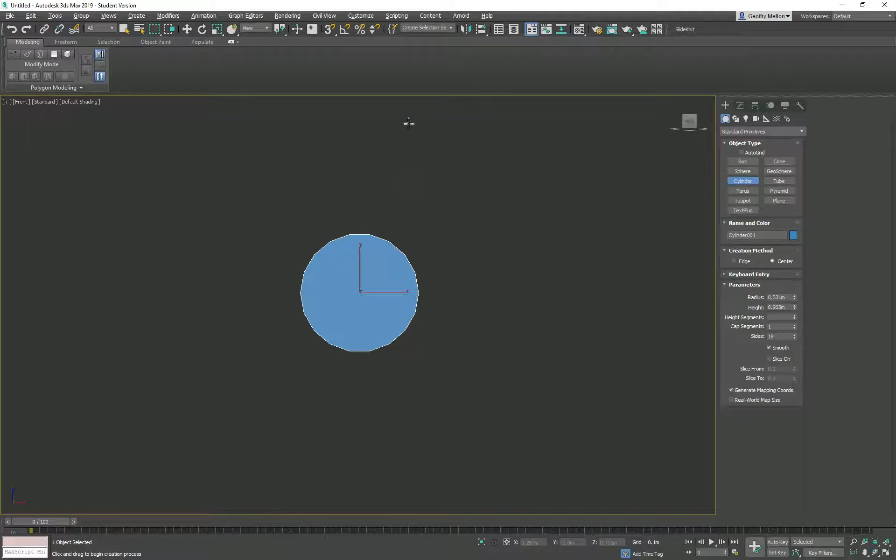Got a front view. Oops, did that wrong. So again, go to the top view, cylinder up. Go to the front. I'll thin it out, let's say 0.25 for the width. It's pretty tall, so let's just say 1 for now. We'll do 0.1. These are meters, so they're going to be big.

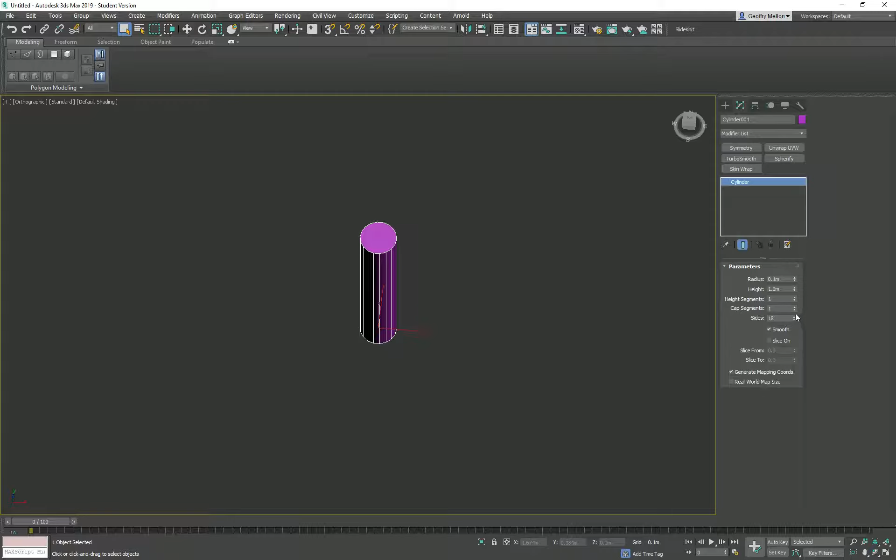At this point, what I've been showing you is you don't need any of this other stuff, just the amount of cuts you want on it. I think the last one we worked with was 12 for a test. So if we look at this, we collapse it down to an editable poly.

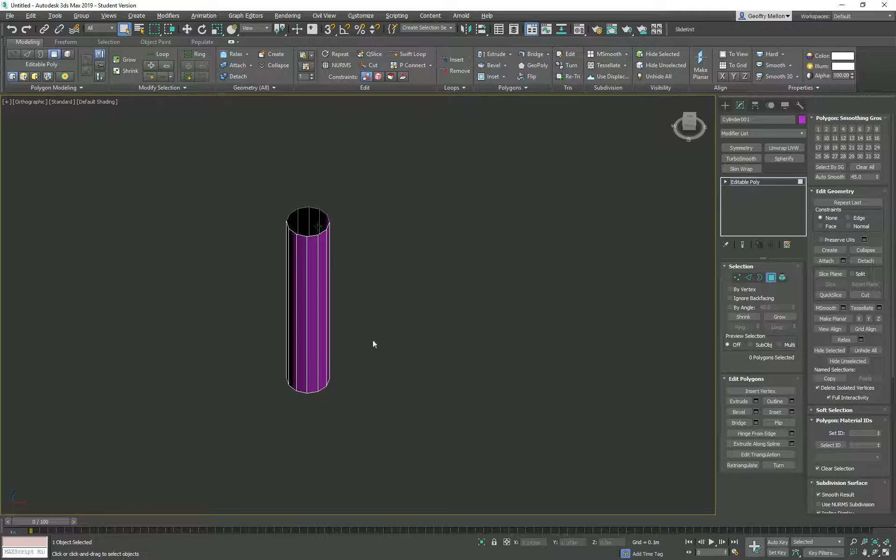If I wanted to make this like a handle with straps on it, how would I do that? There's always two or three ways to do it. If you do it the way I do it, one way... but let me show you a different way real quick.

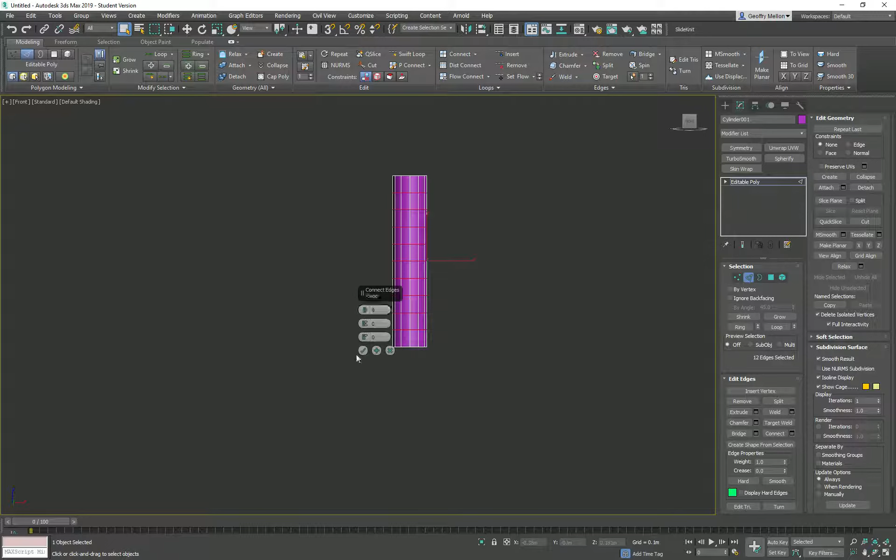I'm going to grab all these edges and divide them. I don't want to use Swift Loop, this way I can get them all even. I'll divide them... let's say that many. And then I'm going to hit 4 to go to poly mode.

Grab all of these. Now I'm going to have to do it a little bit different. I'm going to grab every other one of these like this. Then I'm going to extrude.

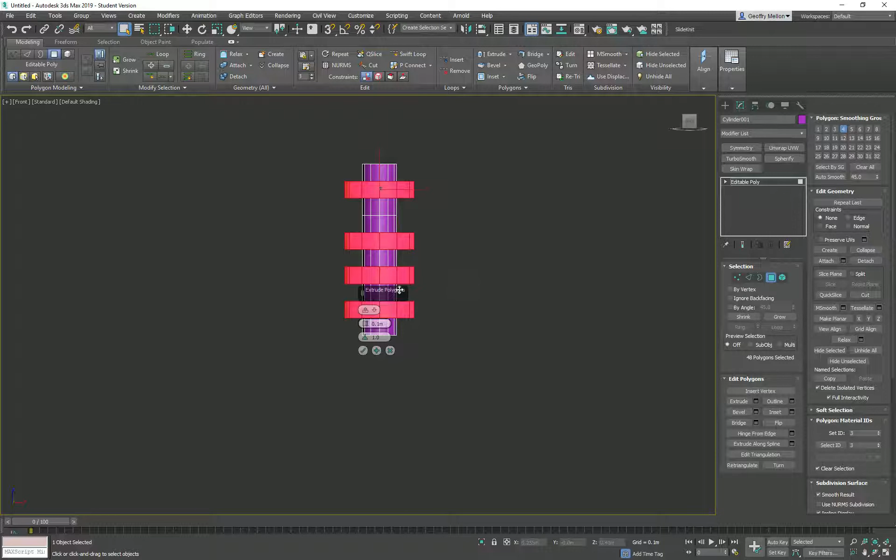Then along a local normal, I'm going to pull this back in—actually let's do bevel instead. I always say extrude but I mean bevel. Again, same problem, very cool looking if you're making a gear, I guess. Pull this in way much. Oh, that's pretty good there actually.

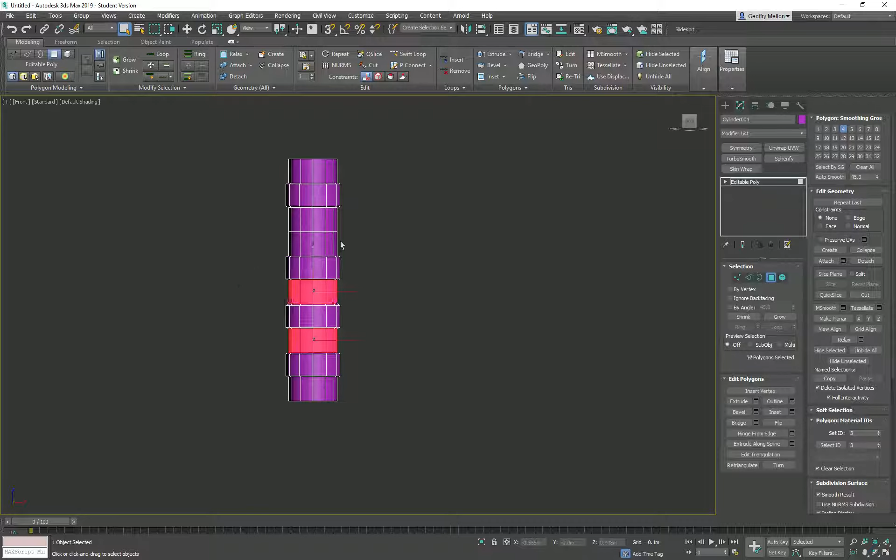Let's pull this in just a little bit here. We'll pull this out a little bit. Okay, I can take these. It looks like I missed one.

You don't want to do the two next to each other, because if I do, I'll show you—it's automatically going to keep that, but if I grab the two next to each other, it's going to grab them both as one. So I have to do this a couple times, I'll just take that and do this last one. And then if I turn off... you know, I've got a handle.

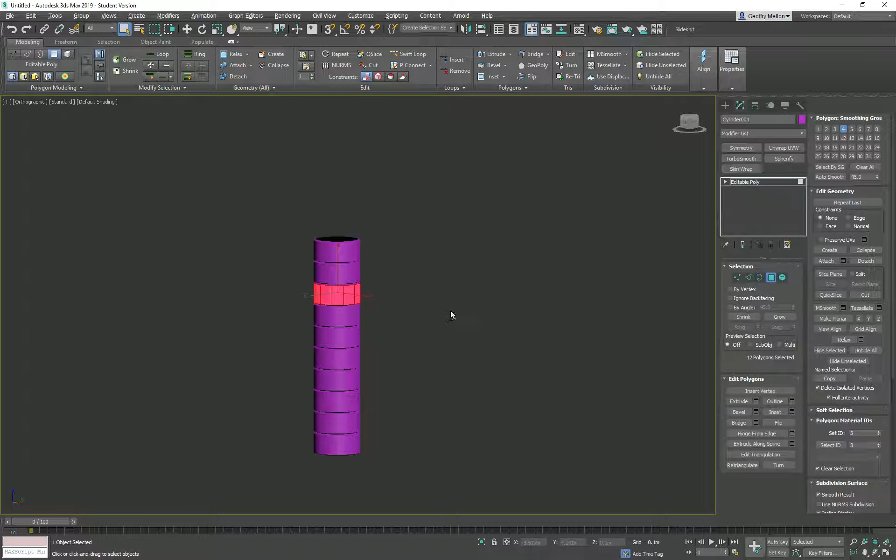Again, there's 100 ways to do the same thing. If you know this is the width you want it to be, let's go back here, look at this. I'll go to 2, go to edge mode, grab all those edges—cheap way of doing it, and I think this is closer to how I did it. Oh, that's the wrong button.

Closer to how I did it in the test—I just used a chamfer. Don't even do that, goodness gracious, my brain. All right, there we go.

We're going to use extrude. I'm going to pull it in a little bit, and then pull the width out. So I've got that, pretty close to the same thing. Or we could do it the other way that I do stuff, and this way it would make the edges a little bit less even, because I'd have to eyeball it.

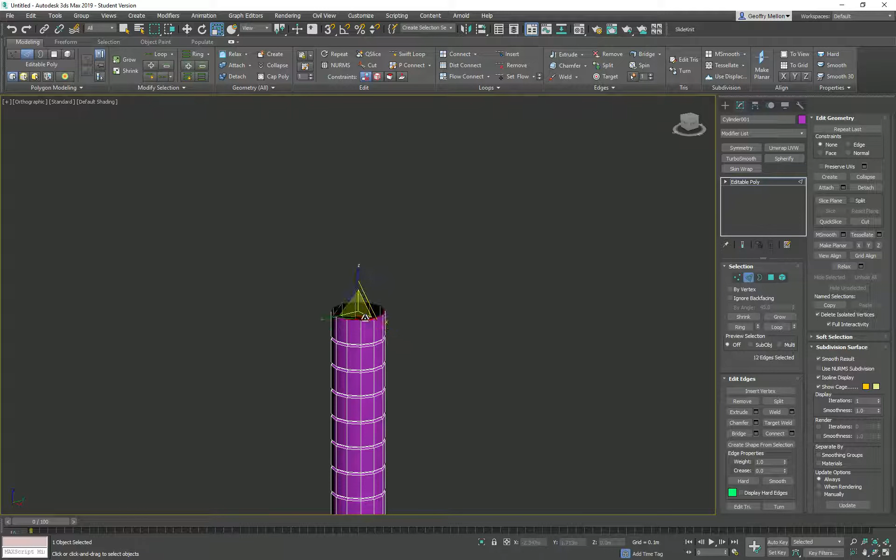But from the front, I would extrude it in—about that much. I could pull it up a little bit, and then extrude it back out, pull it up a little bit, and now I get the same thing. Just have to eyeball it. So extrude, and if I'm smart, I can look down here and make sure I'm doing the same amount every time.

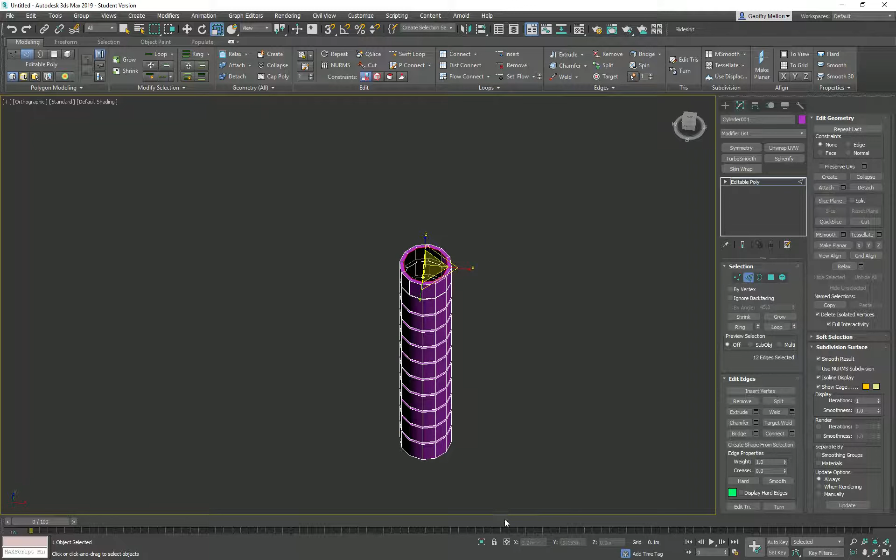So 80, we'll call it 85% or 85 units. Pull it up a little bit. If we're paying attention, we could do the same thing, but the point about doing it this way is that you're going to take more time watching your numbers than you're actually going to have building. Look at this, I forgot to go up on the last one, and then you're going to have mistakes. So these ways are a little bit faster.

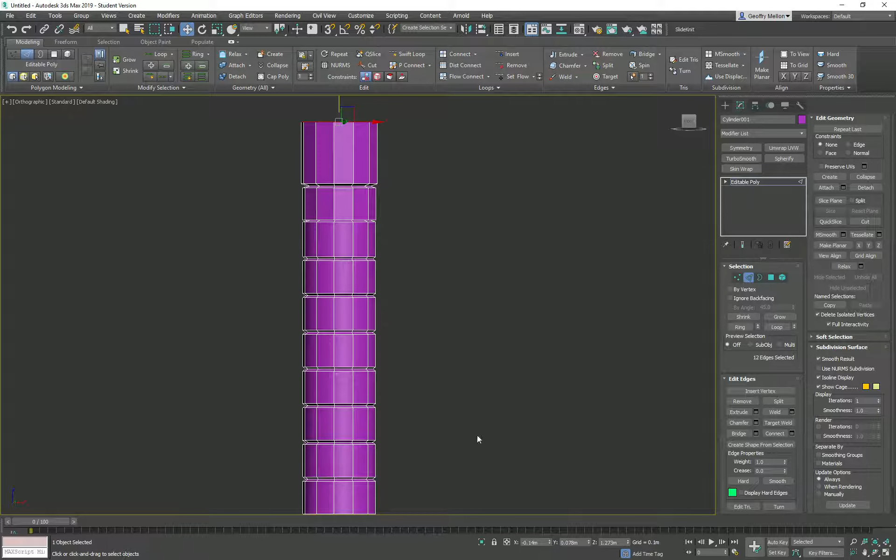Well, there's another way too, and there's some tools we really haven't talked about, just because they don't come into my brain very often. There are definitely times when they're useful. Those are the times that I use them. So let me make sure you understand what they are.

We've talked about polys as they're built. Let's talk about splines and lines. These are actually called line shapes, right? These are all shapes, this is the shape menu. But we're going to look at it, and we're going to make these lines, and they're actually called splines. They're edges and verts, but they never connect, so therefore we never make a full polygon. So if I take this, oops, I've got to get in the front view here.

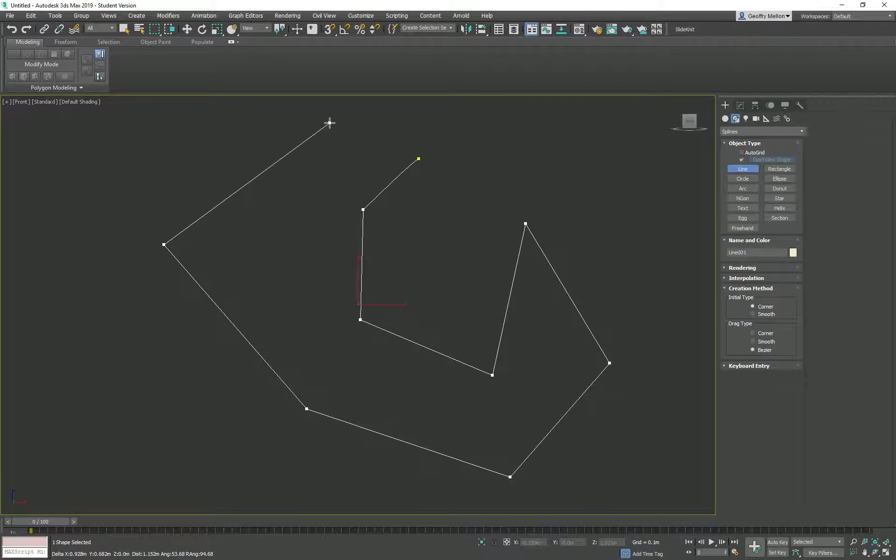Delete that. Front. If I click and drag, just click, not click and drag, but click to the next one, single clicks, and then I close this, it makes a closed spline shape. Now what does that mean?

It means this isn't - this is a wire. This is not the wireframe mode. You can see that I'm in full default shader, and if I rotate it, you'll see that there's just no form to it. That's because at this point we haven't really told it to draw polygons, we're just telling it to draw the edges.

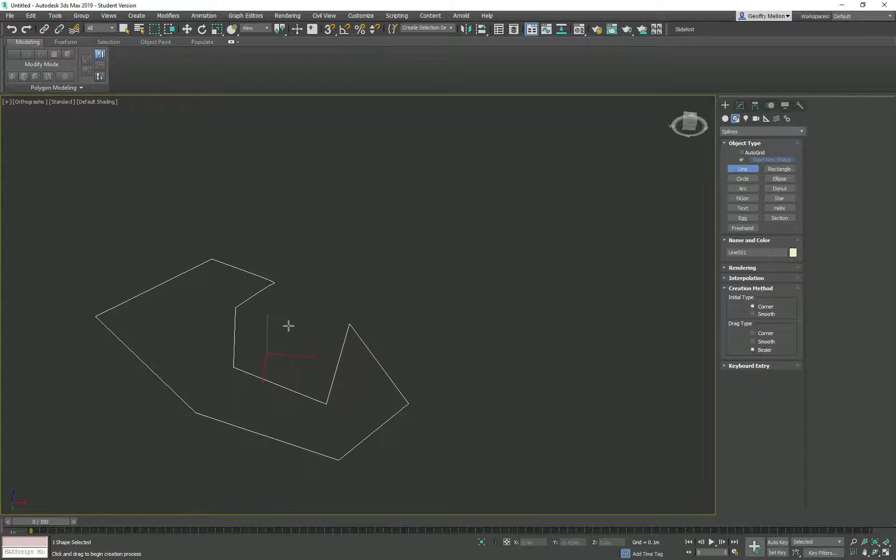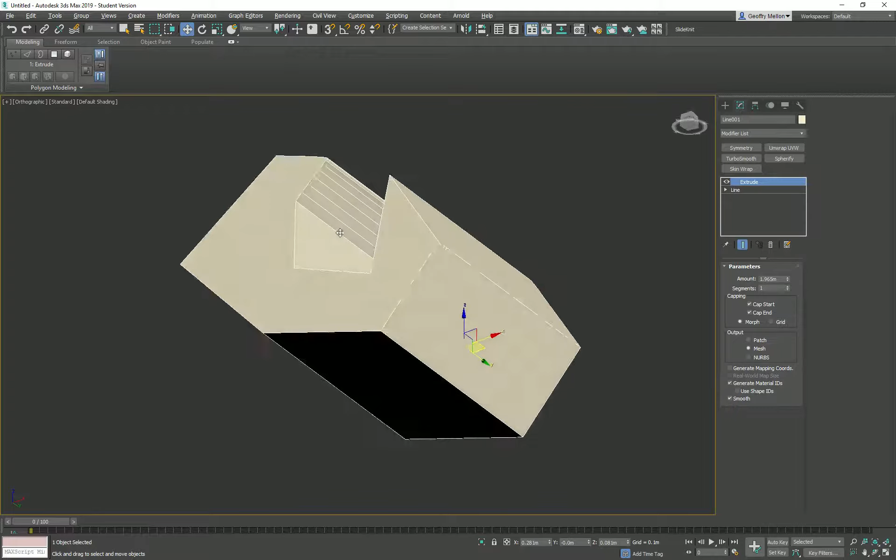So what's the point of using this? Well, you can extrude it, for example. I could take an extrusion modifier on it, and if you want this kind of funny shape and you don't want to model it from a plain form, you could do an extrusion like this, and say how much you want to extrude it, and now you've got this shape. Now, I don't generally like using these because it makes edges, first off, and I'll show you how to get rid of some of those, and then it makes your cap just a plane. So you're going to have to come in here and cut this up the way you want.

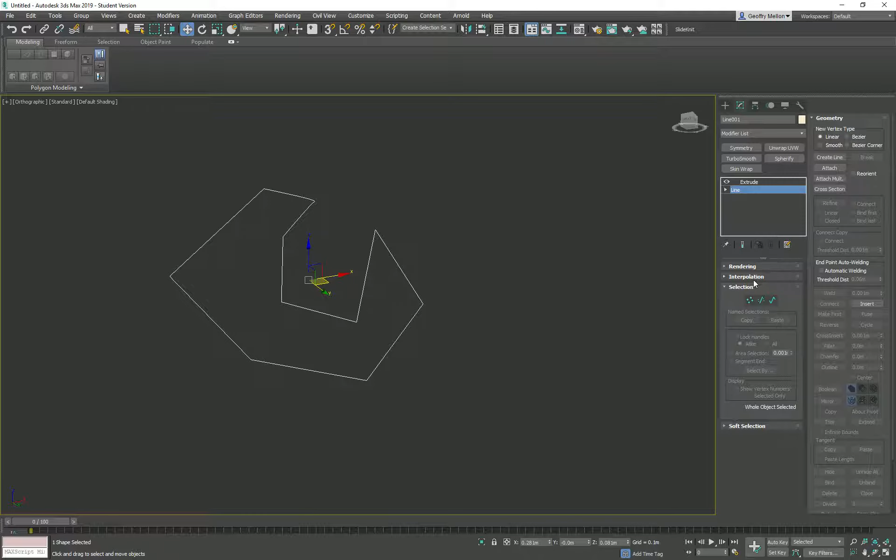But let's talk about what it's done here. Oh, I'll come back to this. Now, since it's a modifier that we just extruded, if we can go back down in the stack and look at what we have here - if we go to the verts of this, you'll see it doesn't look like there's any cuts. When I look at the final one, there's cuts. So what's going on? How is that possible?

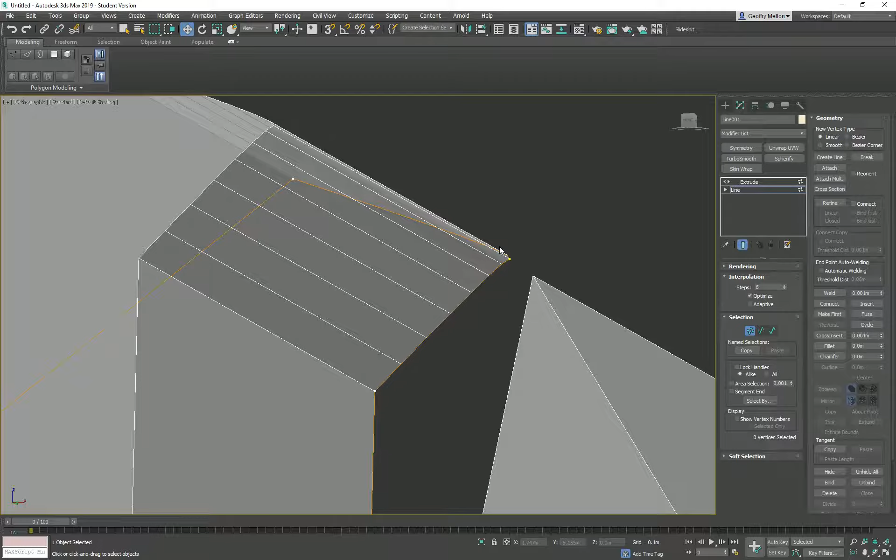Well, okay, see this little curve right here? That is making me divide this thing up. So if I look inside the interpolation, it'll say 6. So we'll see 1, 2, 3, 4, 5, 6. All right, 1, 2, 3, 4, 5, 6. So it divides it 6 times between the two edges, makes 1, 2, 3, 4, 5, 6, 7 actual polygons out of it. But so it's interpolating it 6 times. You'll see this side's the same thing over here. But I still don't see the verts that it's making those cuts from.

It's because if you have any kind of curve on this stuff, it's going to try and use the default 6 divisions to make that curve smooth. Now, how did I get a curve? Well, I dragged this when I created this first spline here. If I click and then let go, and click and let go, and click and let go, I just get straight points. But if I just happen to click and drag at the same time, all of a sudden I get these little curves.

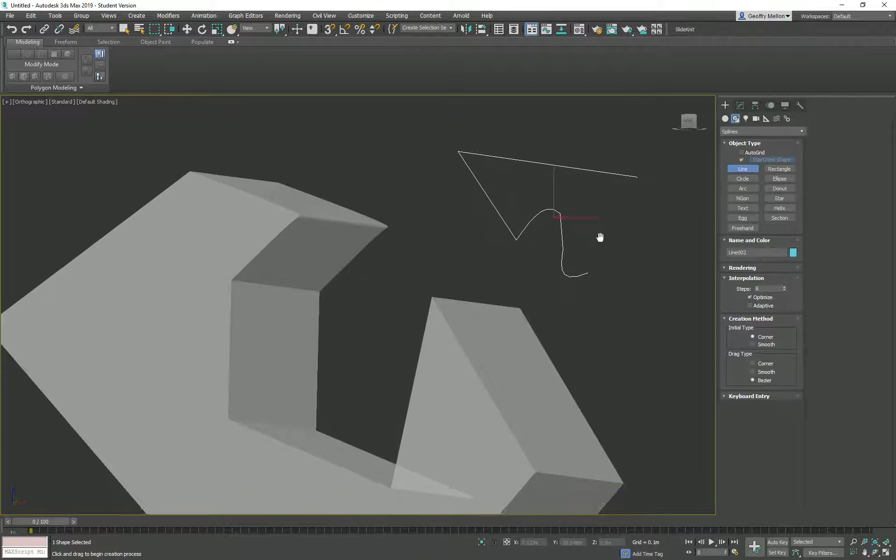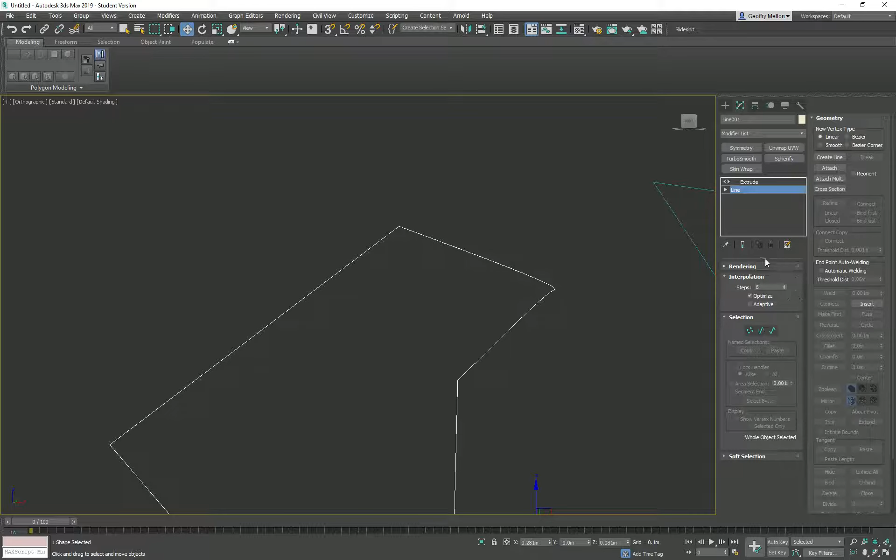This may be what you want, or it may not be. Because there are that many curves, when it made this curve it interpolated it by six divisions. I don't see a curve here... well, there is, just a little bitty curve. If you look at the original object, it's barely a curve, barely visible. But if I turn those interpolations up or down, it divides this up more or divides it down more.

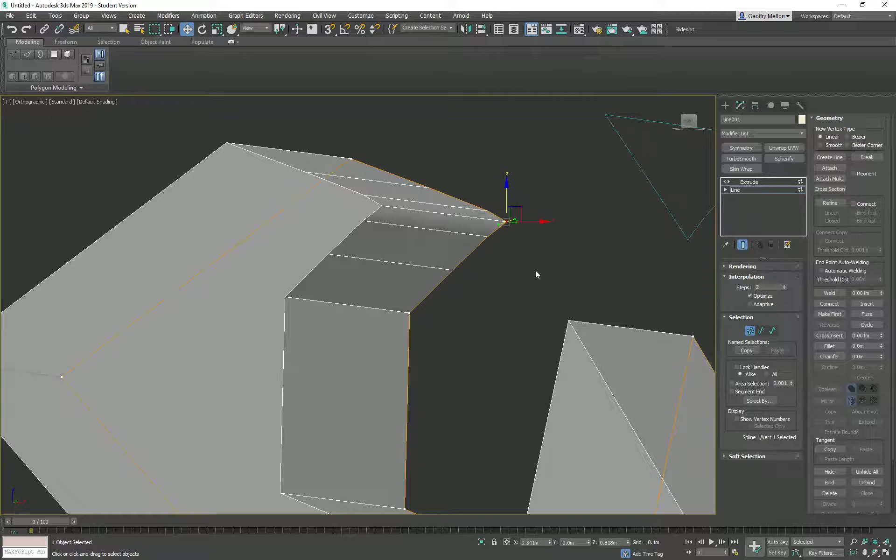So if you want to get rid of some of these edges you don't mean to have, there's a couple things you can do. Come back into vertex mode, look at the vertices. If I select this vert, there's nothing to it. If I select this vert, it's got these handlebars that do this - these are called Bezier handlebars, the math that interpolates the curve. If I don't want this, I can turn down the divisions, or go to the right click menu which controls what kind of vertex it's drawing. If I change this to corner, bam, no more edges. It's just about the way I drew it out, a little drag and click when I meant to click and then drag.

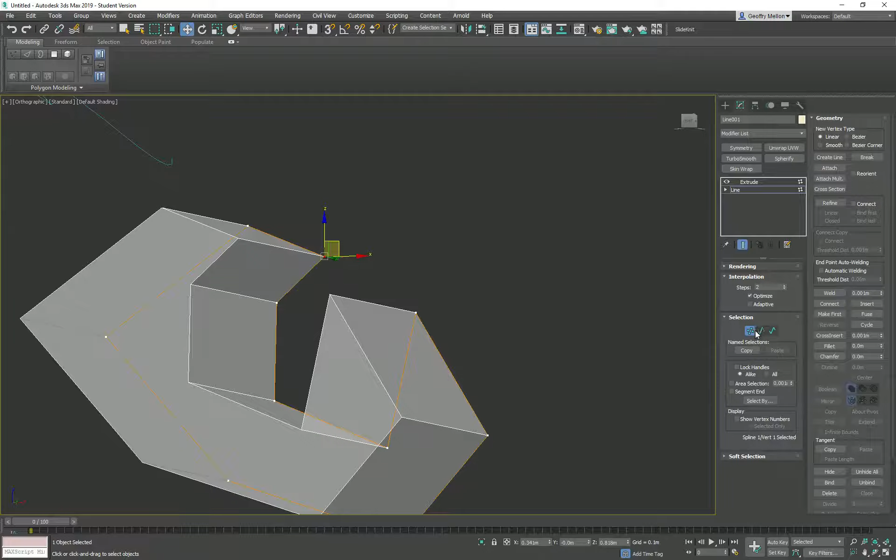So that's splines, and I'm going to go over a few of them. I just wanted you to understand why you would use it. We're trying to get back to where we want to be: an editable poly that we can control, and cut up and divide the way we want. Even if I make the form this way, it's never finished, it's just the starting point. Some people like to use splines for that stuff, and I wanted to make sure you understood them.

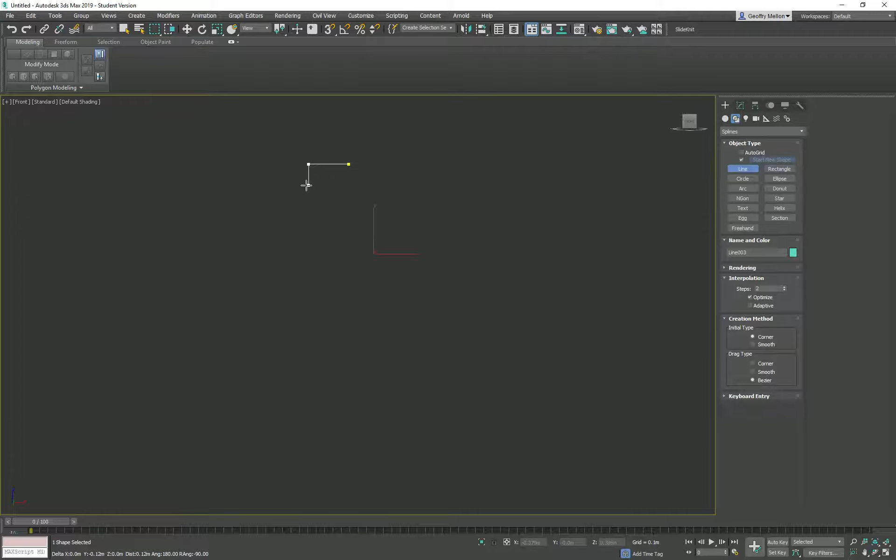Let me show you another example. If I go to the front viewport - another reason I'm not crazy about these things - building in the front viewport is a little bit cleaner. I take this, hold shift, and it'll snap it. Then I click, click down, click over, click down, click over, and you get the idea. I keep clicking down and over. Let's do one more, there we go. Then I come back to the middle. You can kind of see a form there.

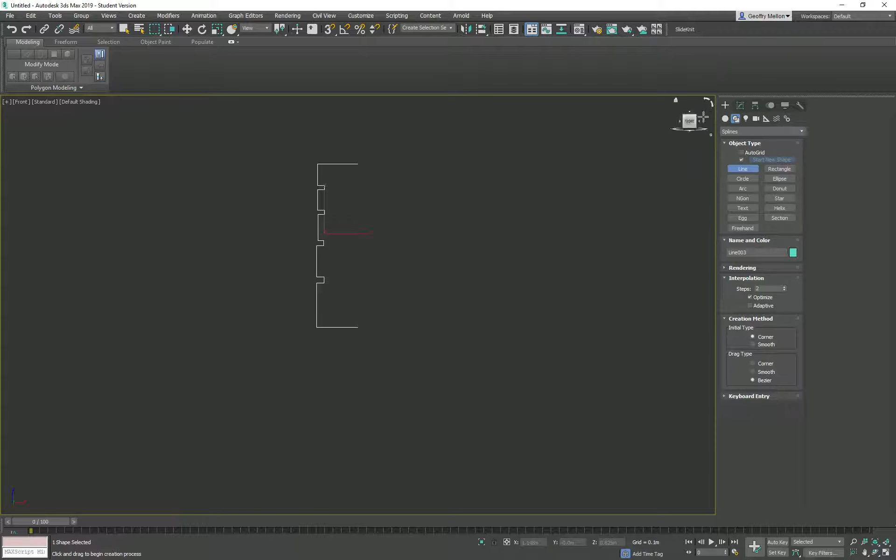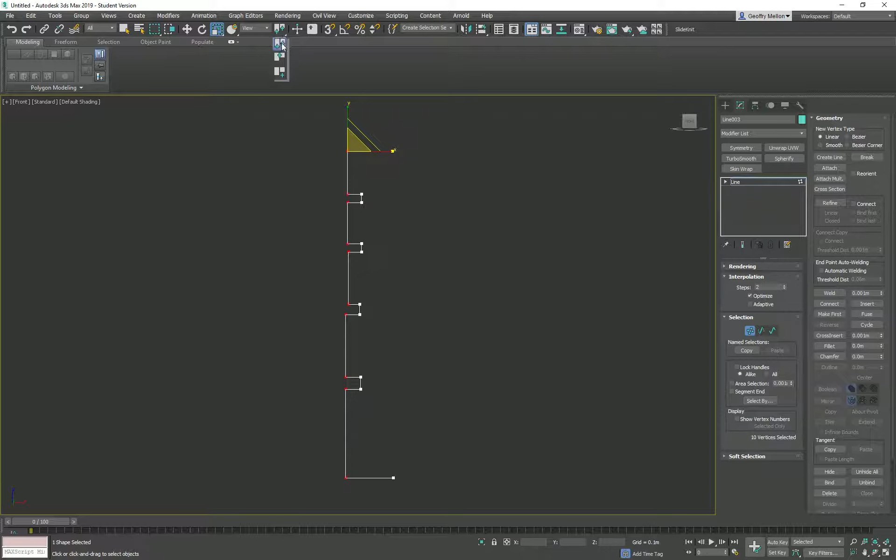Now if I'm ready to work on this spline after I've made it, all I need to do is go back to the modify menu, go to vertex mode, and look at this stuff. I'd love for these to be evenly laid out, but they aren't, so I'm just going to move them by hand. I could try to scale them in, but it'll be easier to fix their evenness inside the 3D model instead of this. I could take all these verts and go to the scale menu, turn this off so it's only doing one axis, and scale them into one position. Or I could just click a button later and make sure I'm exactly right, because I could still be off by little tiny bits.

Anyway, if you want to look at it, this is like a lathe. Let me show you what a lathe looks like real quick. Open this up, go plus, let's say lathe. If you remember your woodworking shop, the idea is you put a piece of wood inside here, and it rotates around and around and around, and then you carve out the wood to make it look like, let's say, a table leg. That's what it shows.

This piece of wood is spinning and spinning, and they just carve on it. Now it's the same kind of thing you would do for metal too, but it's just not the way we think of it. It's the easiest way to describe it this way. Let's see if there's a video - maybe that's an even better description. There you go.

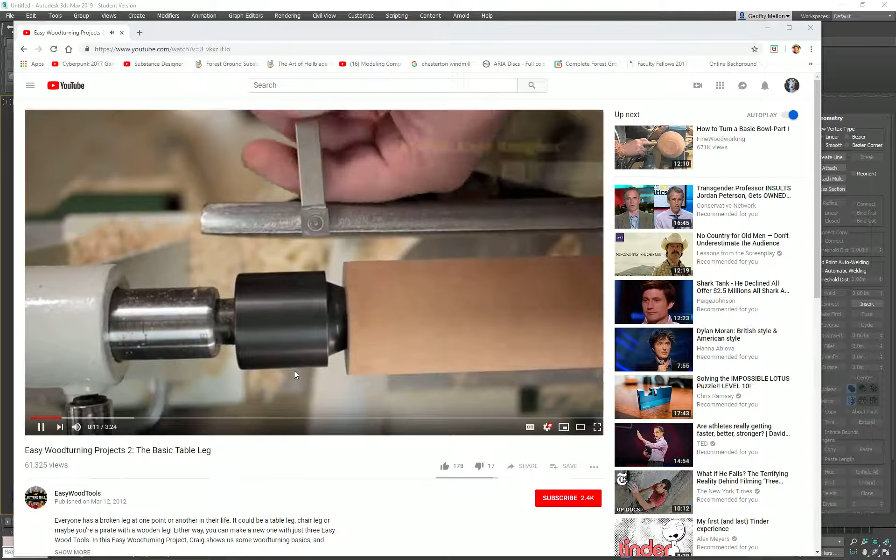I don't know if we really want to hear this guy, but I'm not even sure. Oh, I know why, I think I turned off my audio here.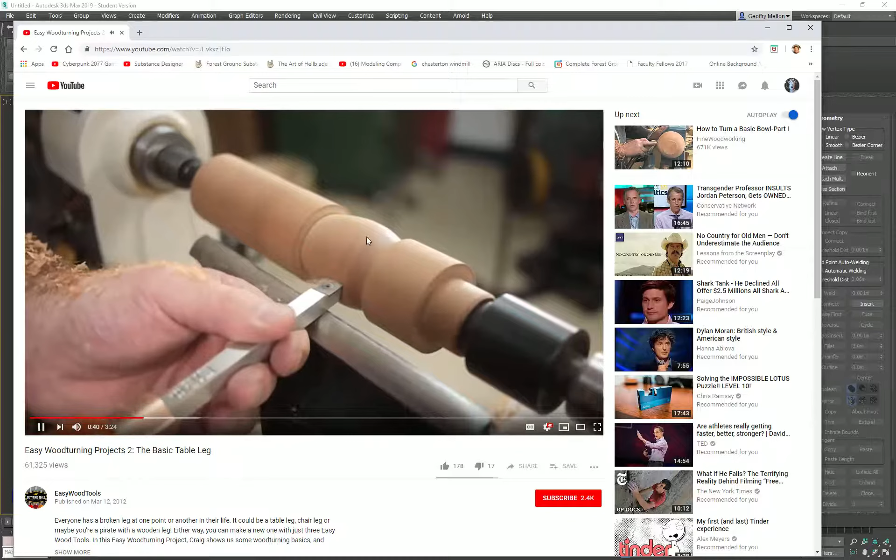See, all he's doing is going in, and you get the shape by having flat tools. For this curved edge, he's just going slowly across that right there.

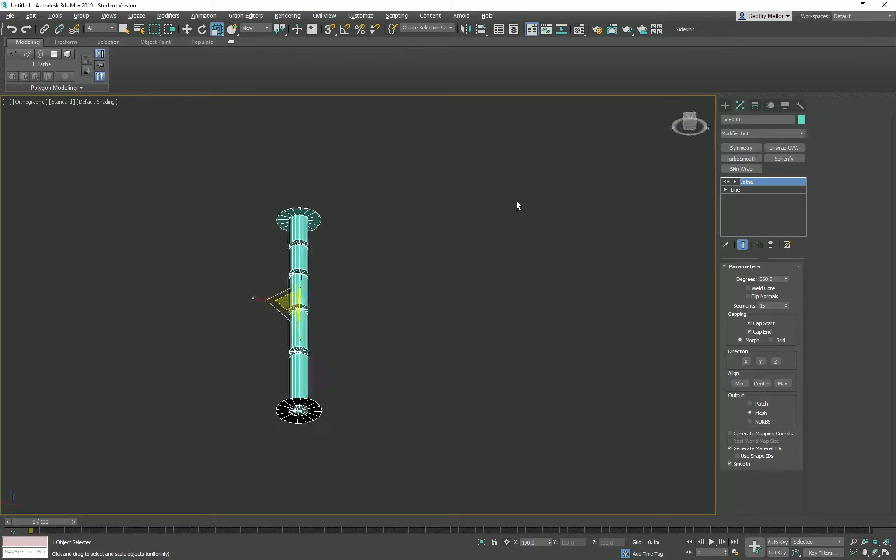That's a lathe. The reason I told you that is because if we go inside our modifier menu and look inside here, we come down to L for lathe, and the first thing you get is lathe. It's going to rotate itself around the center of the object by default, and that's probably not what we're looking for, but it gives us a way to make a 3D object. So instead of saying center, usually I say max, because that's going to go to the outside edge.

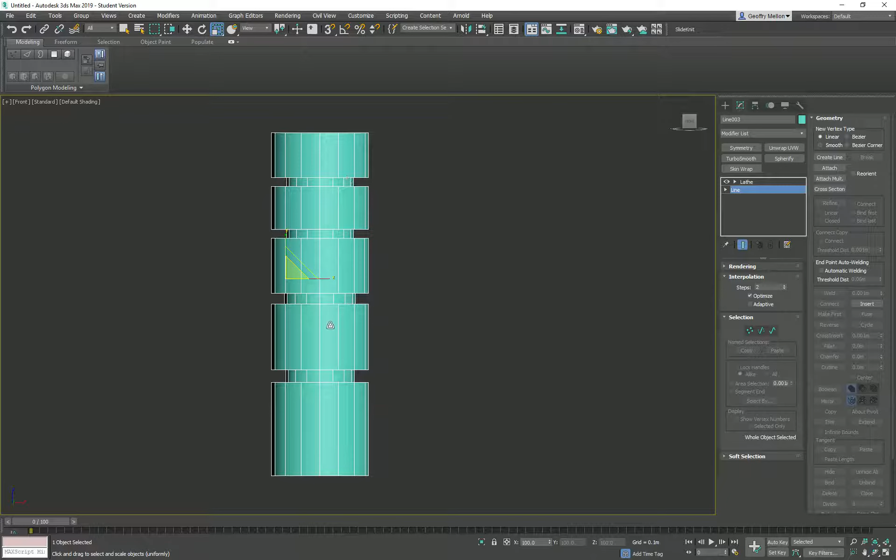So if we look at max, it's this here. This is the max, this is the min, this is the center. So if I look at it and say max, it goes out all the way, doubling the width.

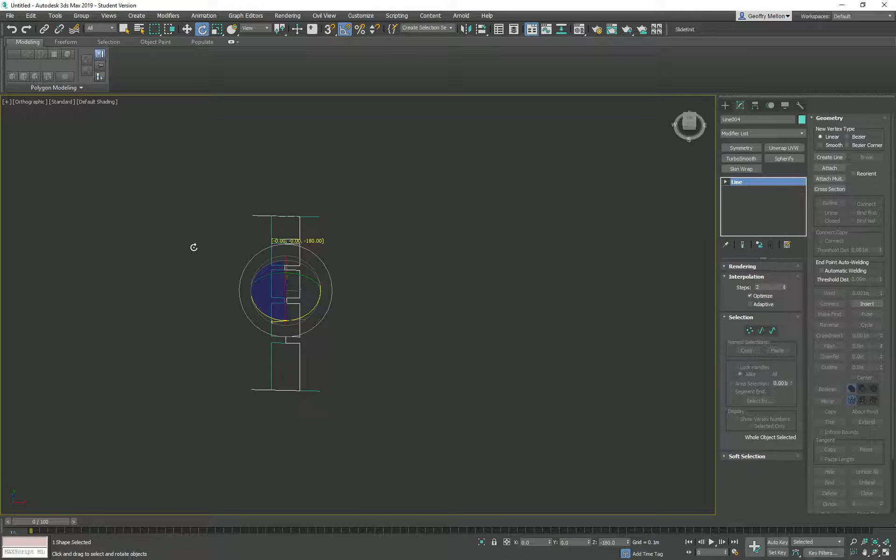So if I basically did this - let me get rid of the lathe and try again. If I do this, move it over here in the center, and then take this first one again and say lathe, go max, you'll see it matches perfectly, because it's going to take the furthest point out and use that as the center point of a lathe, like when it's rotating around with the wood block. So that's a lathe, and that's what we use those for.

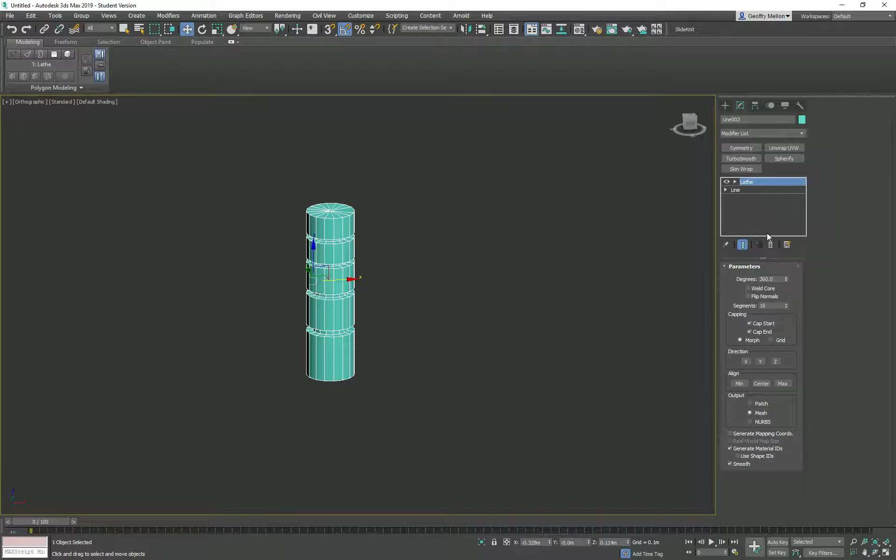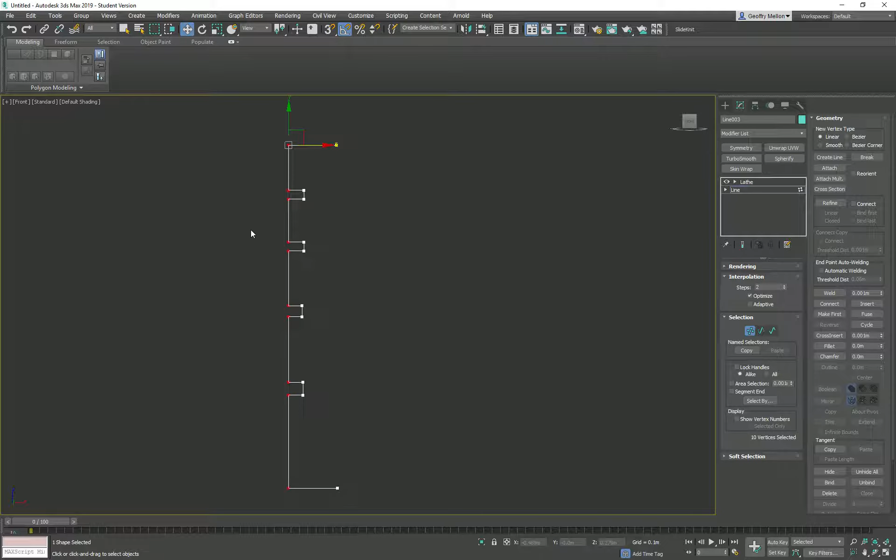Like if I was going to make that wood table leg like he was showing, and I want to use this lathe tool type of deal, I would come into here, go to the line. Let me get rid of this one actually, delete. Come in here, go back to the line. Since I've got it all straight at this point, I'm going to grab these.

I could take one of these verts, turn it to a smooth. Let's see, smooth's not the best in the world, so I'm going to go Bezier so I can control that handle. Move it to here, Bezier, move it to here, rotate it.

Probably want to change the interpolation to 6 like we had before. Now, when you're moving these handlebars, whatever your last move was with this move tool gizmo is the way it's going to move. So if I want to make it move in two directions, I need to grab that - now it'll move in 2 directions. So I grab it in this and then move it. You'll see that I can't make it go right and left because that hasn't been the last one selected.

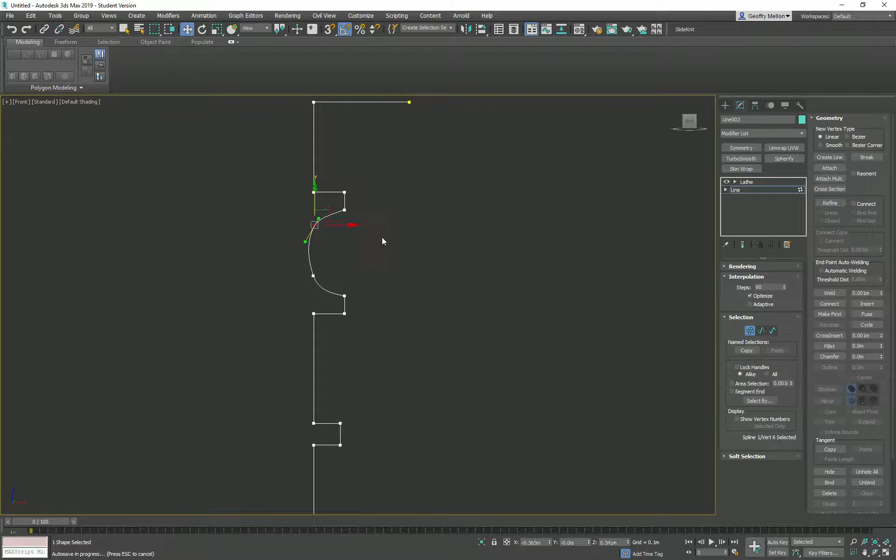All right, so I get something like that. Move it to the middle maybe. Now if I look at the lathe, it's this round piece. That's kind of the reason they call it a lathe - inside other programs like Maya, they call it revolve, but it's the same thing.

So I'm going to grab this, go back to front, grab this edge here, and drag it out a little bit, and we get something. You can see that there's some cool stuff to it, but the problem is, and this is the deal...

If I go back to 1, the problem is it gives you all these subdivisions. That's not necessarily bad as long as you turn this down to 1, okay, maybe even 0 - at least then your subdivisions aren't eating away. But if you try and make this smooth, you're going to get a beautifully smooth thing, but you're going to have so many edges. Let's say even 10, that's a lot of edges. There's no reason for that many edges, especially when it's going to be a table leg or something.

So you can make some really cool stuff out of this. You can also do other things with splines. Like if I take this line right here and go to the top, I'll delete this one right here, and do some pre-made shapes like a circle. Actually, let's do an ellipse - an ellipse is a non-perfect circle, so it's in an oval position here. If I move this over, I can take things like another - let's do a rectangle, and I'll make a rectangle, but I'm going to do it from the front.

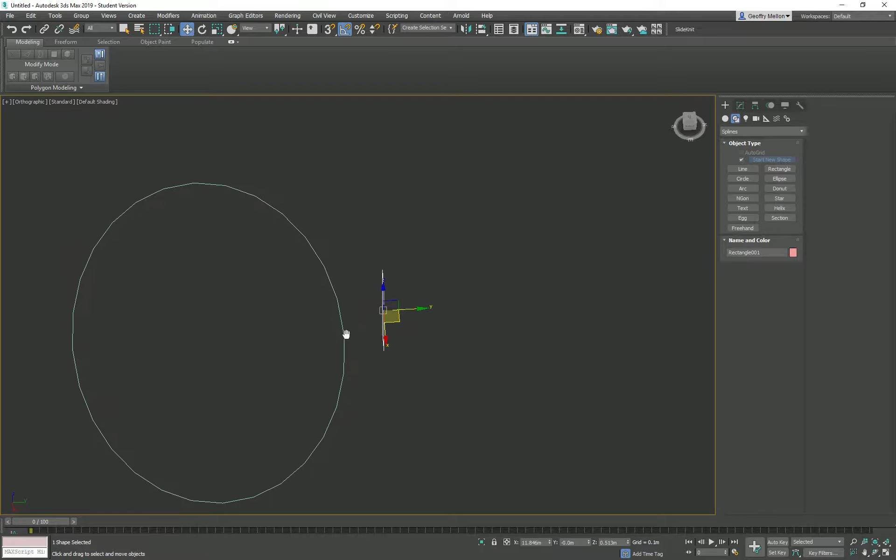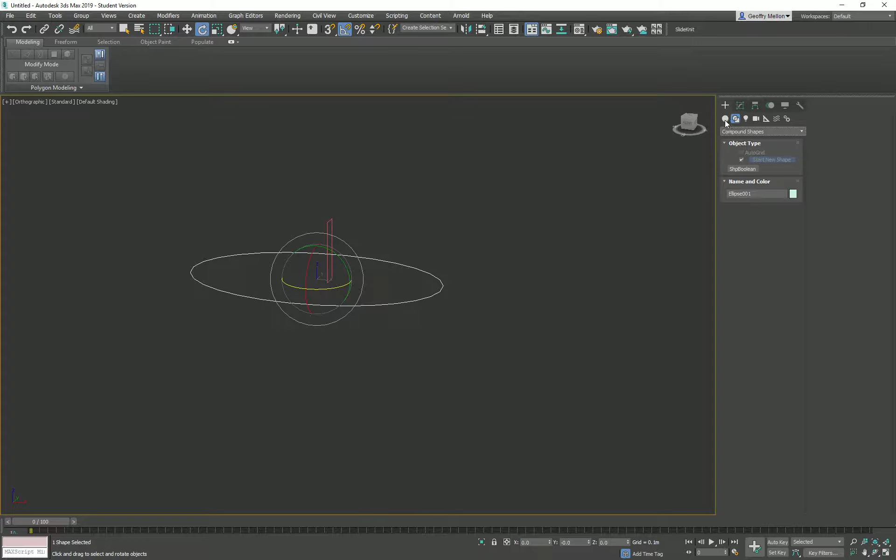It's on there. Now I can take this one and come over to, instead of the modify menu, I'll go down in the drop down and go to compound objects or compound shapes. Oops, compound objects. You have to go back to the modify, go to compound objects. Then you're going to loft.

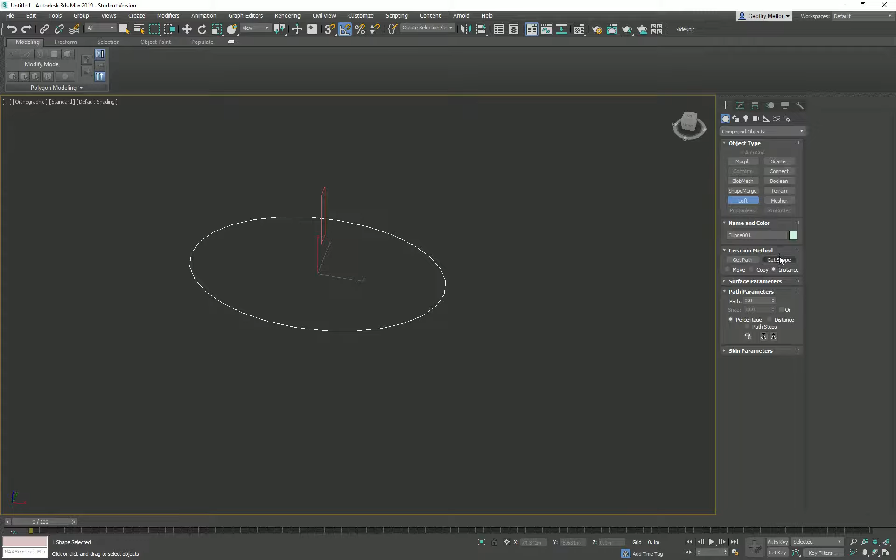What a loft does is it'll take one shape and use the other shape to define its form. So you'll see if I look here, it says path and shape. I have the path, which is the circle I want, and then I'm going to get the shape. So I'll click on the shape, and now I've got that right there.

Again, all this is a torus that's defined a little bit funny, and you still want to cut it in half and do all the other stuff to it. And look at this, it's divided it for you, and you do have controls over that.

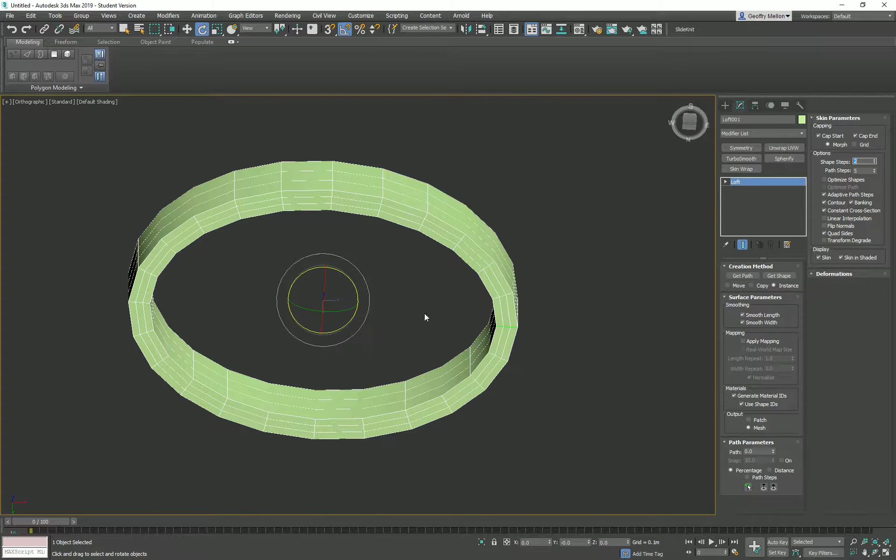If I come back to the modify panel, surface parameters - I guess it's skin parameters. Change this to 2, and it's going to have 2 or 1 or 0. So it does a perfect like that.

I can also say the shapes, again, between them is 5. If I turn this down or up, there's the actual points. Now remember what we're looking at is this object, its shape. So this edge right here.

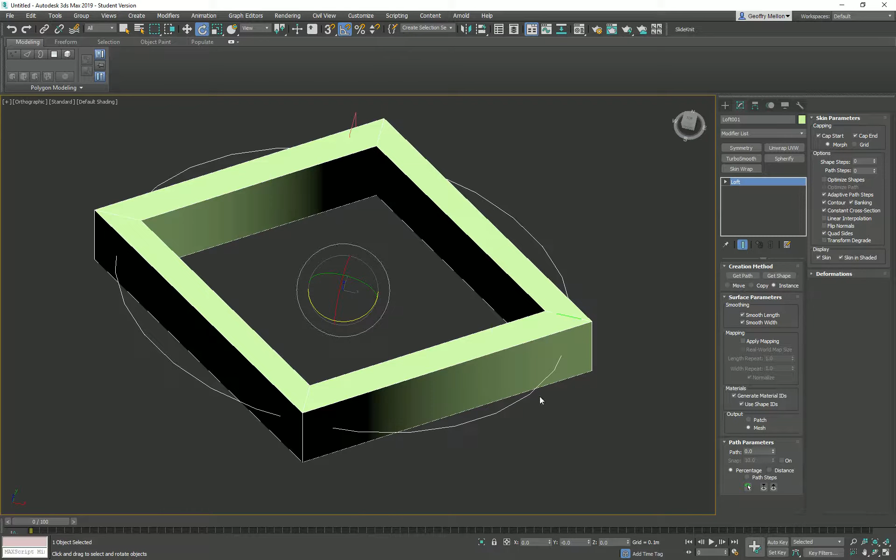Because it's got interpolation on it, meaning that it's dividing it up, it divided that piece up originally. So if I turn this back to 6, 3 or whatever, it divides it that way. So it's got its uses, it's useful in some ways. In some things it's really fast to get through. In some ways I almost don't use it - I rarely use it.

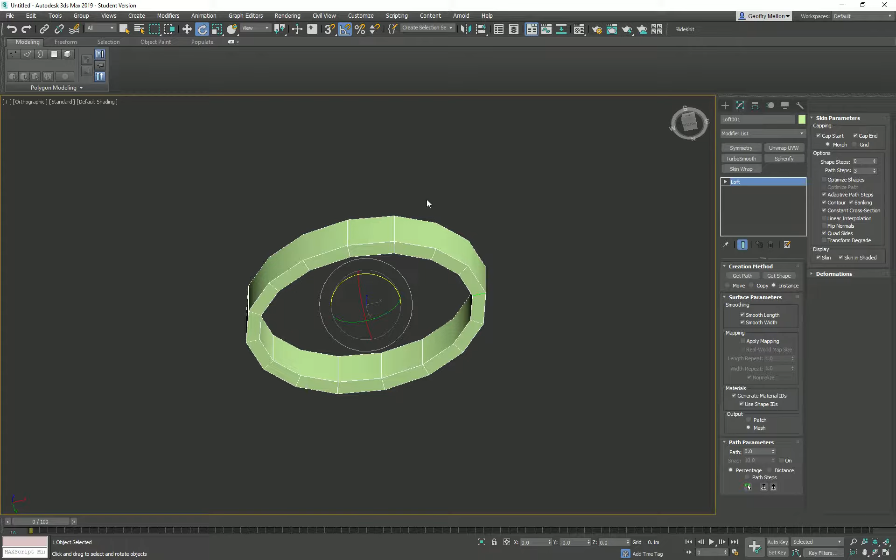There's times like I made for the other class we did this. Let me show you. I'm going to delete this, go to front, take this, edit this piece right here, go to the left, I guess. And if you want to make a division inside of an object or a rectangle, you come inside of here.

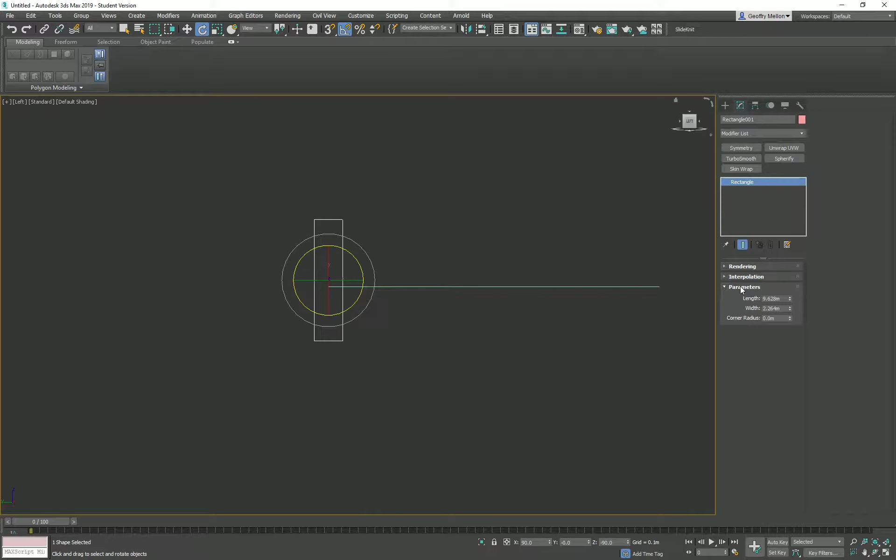You turn it actually by default - you can't mess with the basic rectangle. So you can either turn it to an editable spline and add verts, or you can multiply this and do what's called Boolean. So right now I'm going to do something like this just to make it simple.

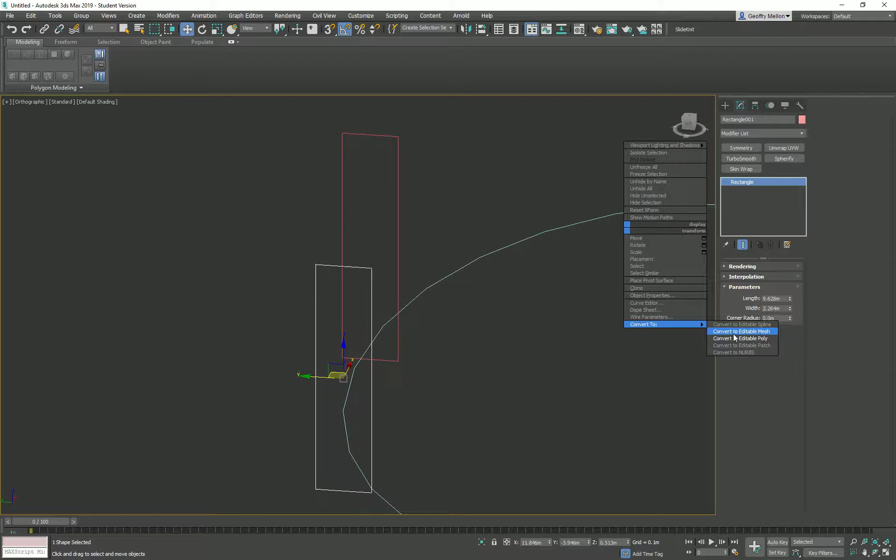And then I'm going to grab the original, turn it into an editable spline again. And inside the spline, I'm going to go to the different modes. So there's vertex mode, there's edge mode, and then there's whole spline mode.

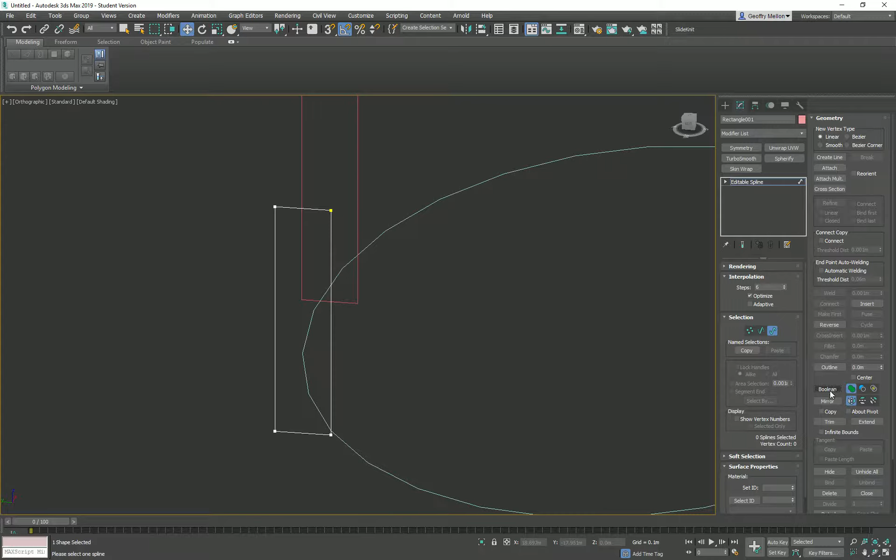So in here, I can tell it to go Boolean, which means I can add these two together. So if I click on Boolean and then click on it, actually they have to be added together first. So attach this to this. Now I have these two shapes that are working together as one.

If I say Boolean and use this button right here, union, let me grab this one first, go Boolean and then click on this one. It'll add those two together like one shape. So that's cool, complex shapes.

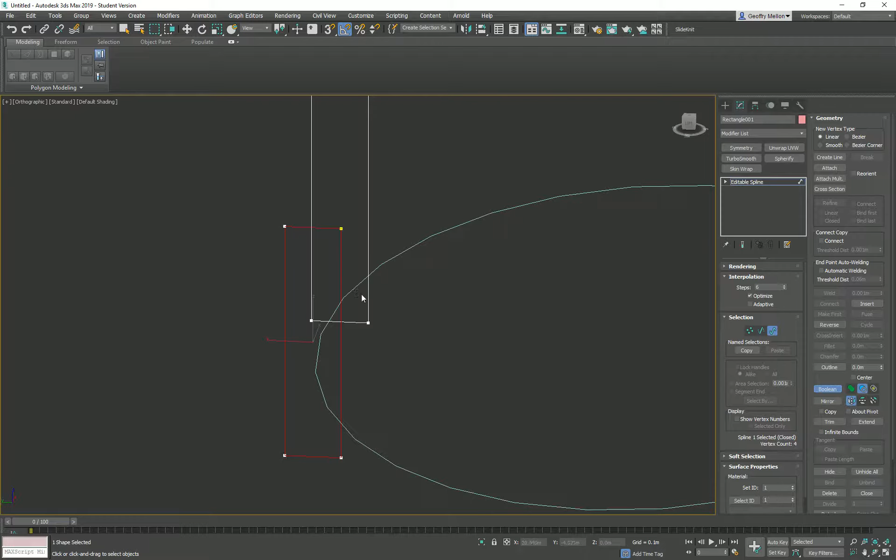If I take this one, which is subtract, and add those two together by saying Boolean, it does that. And then the last one is intersect, so it'll just be the one in the middle.

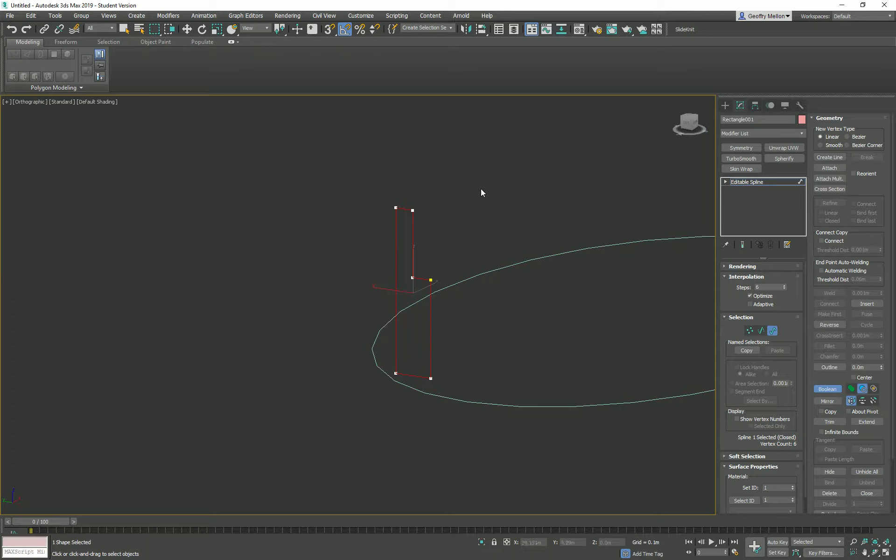So I'll say Boolean, oops no, I'll come over here and say Boolean, and then click on this one, and now I've just got the intersection. So it's got its uses I guess. Again, I'm not sure that I couldn't just make this shape really simply inside of the poly modeling tools.

Anyway, what we did in the other class was when you have an extra edge right here and you want to make more vertices, you can do it the way I was just showing you, add more pieces, or you can just click on refine, and it makes more edges for you.

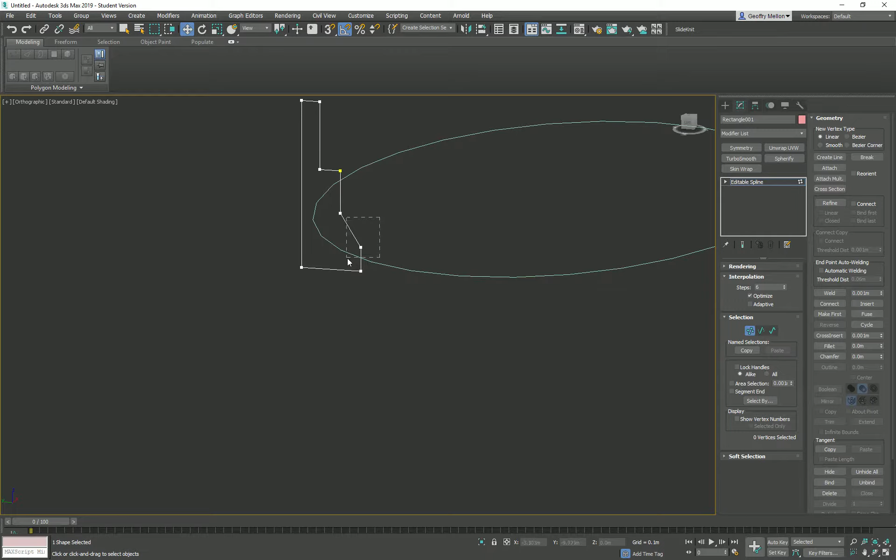So I'm going to take these two, pull it out, change them to corners, all of them. That way I don't have any interpolation. And then I'm going to pull this one up, go to the front view or left view.

Make it straight. I could grab both of them and again, scale in one direction. Looks pretty good. So we made a stadium edge here, or an arena.

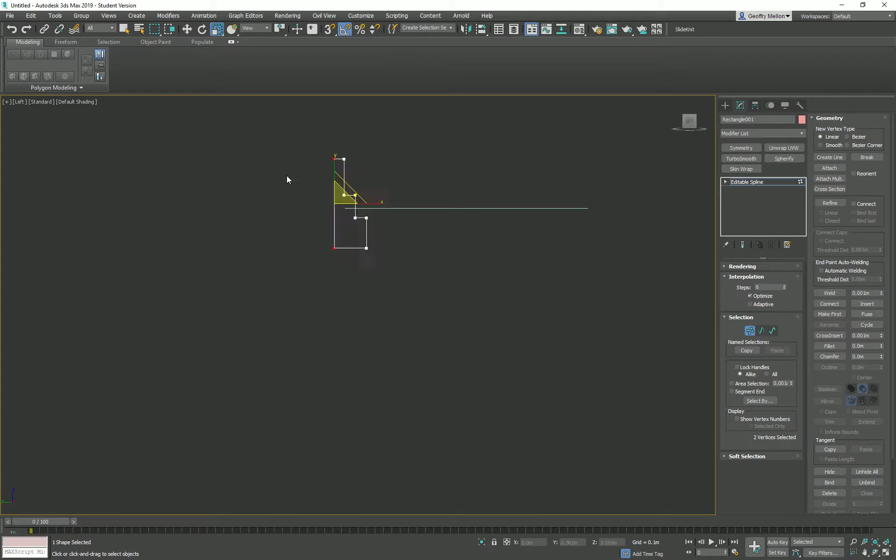I take these two and say corner. All I'm doing when I do that is grabbing an edge and telling it how I want it to be defined. Corner means there's never going to be any interpolation, it's going to be one vert to the next vert. As soon as you say Bezier or smooth, it starts doing the crazy stuff, or Bezier corner.

So I guess I'll show you that real quick. Bezier is this, where I only have that selected there.

It's another reason I'm not crazy about them, the tool sets are kind of funky. I could do that with it.

Bezier corner, on the other hand, lets each of these act individually. So I could have a curve on one side and a sharpness on the other.

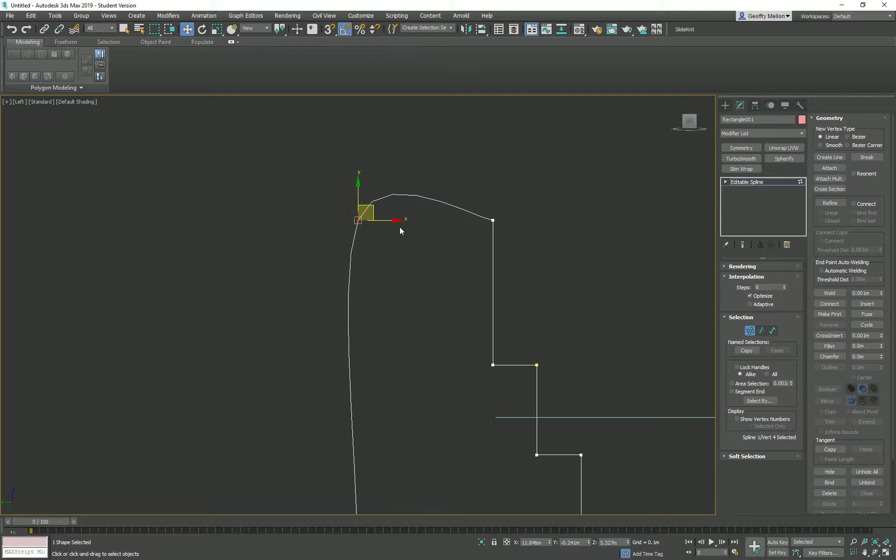The other option is smooth, which means it defines it for you, or of course going back to corner. Generally speaking, I just grab everything and say corner just to get it out of the way, so there's no extra edges that it's creating for me. If I want to make those edges, I can do them on my own in most cases.

If I want to have fun, I can do that, but let's see. So I think what we did is we added Boolean shapes to this, meaning adding more shapes to make this form.

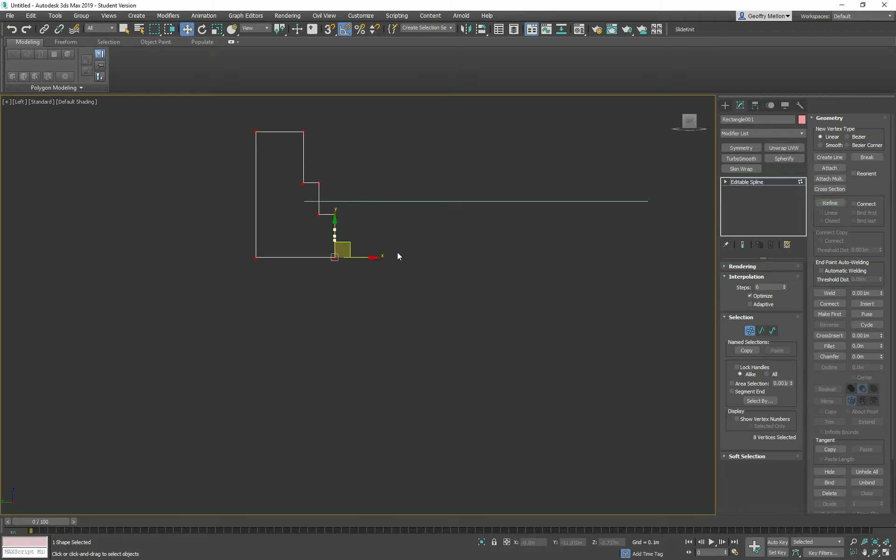But again, I'm all about the fastest solution, so I can grab one here. I'm going to just put a few dots here just so I'm breaking it up. I'm going to pull this.

Let me see how I'm going to do this. Pull this out. Pull this one up. Actually, I'll pull it down. Pull this over.

No, I'm going to pull this up. I'm going to make another vert right here. I'm going to grab that one, pull it up, pull it over, make another vert here. Oh, I don't need that one actually. Just pull this one straight up.

Basically I wanted a little area in the middle there, so I was just trying to figure out how to do that without booleaning it, because usually you could just cut out, the actual exercise was to use several shapes and cut them out.

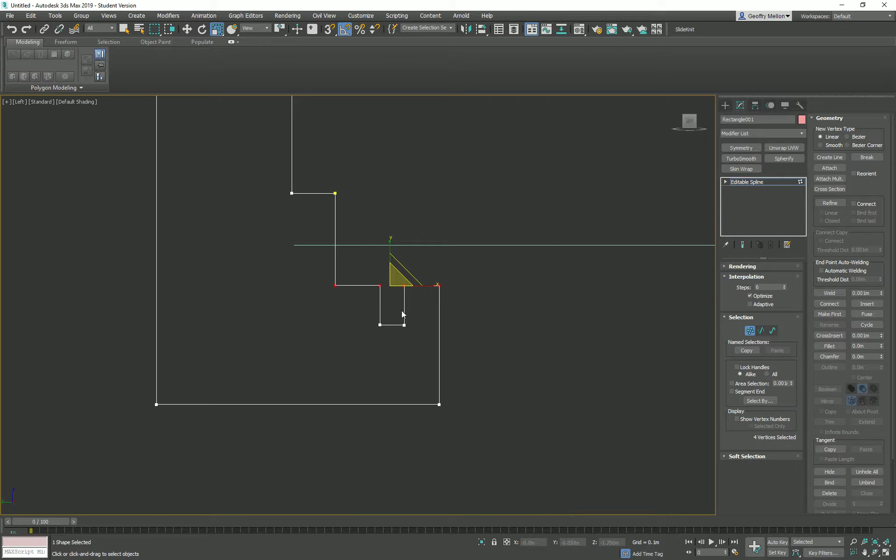And again, yes, these tools are all in here. Yes, they have their uses. Yes, they're cool, I think you can use them for definitely a lot of different things. I'm just back to the point of how do I get to the easiest editable poly shape as possible.

They're absolutely masters of working in splines, and they can get what they want. But the basic idea to me is the most logical solution is how do you get to the form of an editable poly? So let me show you this.

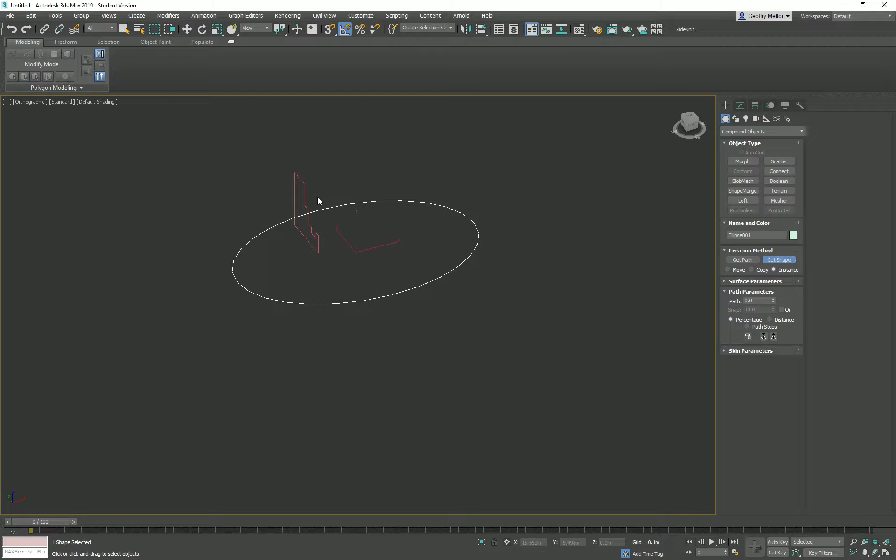I'm going to come in here and say ellipse, and then I'll go to create, make sure I'm in compound mode, which is under standard primitives. And then I say loft, and I pick the shape, and I click on this one. And now I've got this really exaggerated, but this is how we would have done an arena, right?

And again, the cool thing is you can come back in here and edit and mess it up however you want. Add divisions, whatever you want to do.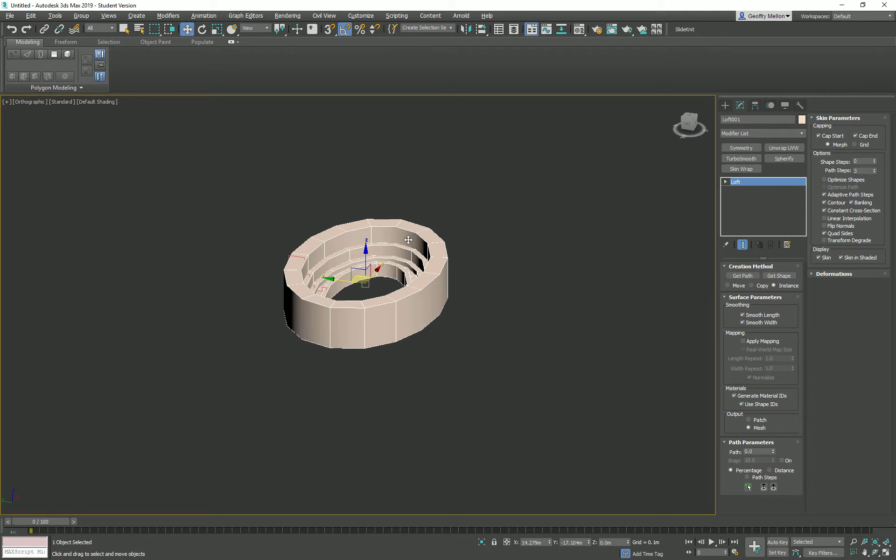But I just didn't want you to not have a chance to see these tools in here. I don't really want you to take the time to master them for my needs, for the class's needs. But if you want to, they're here. And if it's something easier for you to work with, I am all about it.

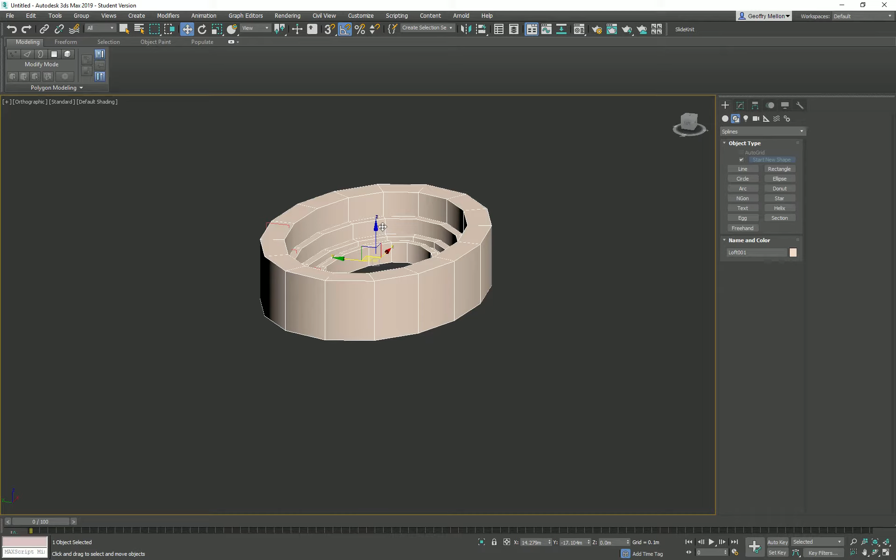There are definitely teachers who like to use splines, and there's nothing wrong with that. We used it to do some complex shapes. It just means you're doing a lot more setup instead of a lot more building. Again, not a problem. I think that when we did the edges, or when we did the lofting here, delete the loft again.

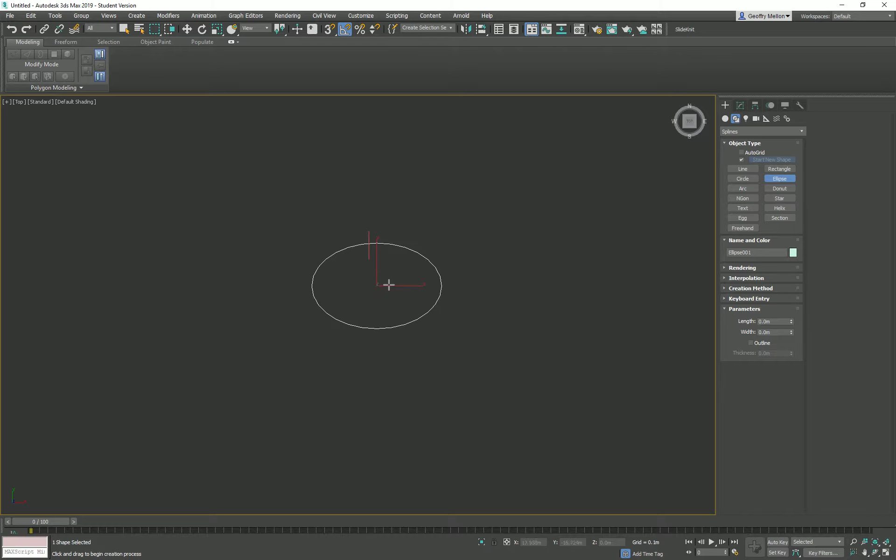I think when I did it, we did top zero. I just want to show you that you can use them just like anything else. That was my point, it's more about how you get to the shape you want than how you use these things. The shapes are going to be the same in the end, and this may be the fastest way to get this shape.

For example, for this arena, if I want it all out of one piece really fast and simple, I might do this, go top, and I needed to make it bigger because it felt really small. So instead of scaling it up outside, I'm going to scale it up inside the verts, once I break it to an editable spline - I'm so used to saying poly.

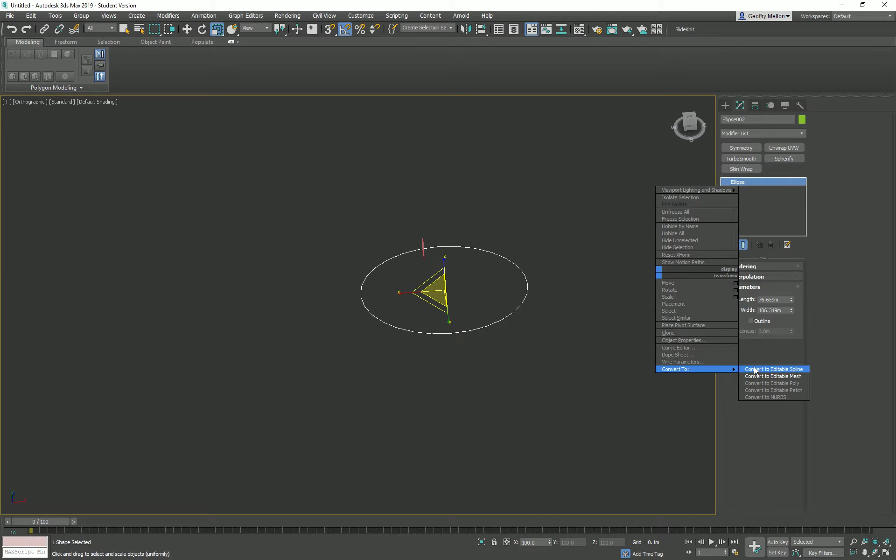If I take the verts and scale them out, it keeps the model thinking it's still the right size. If I take the object and scale it out, it's not exactly correct, meaning it's going to think the object is a smaller size because it's not really defined by its verts, and these vert positions are changed.

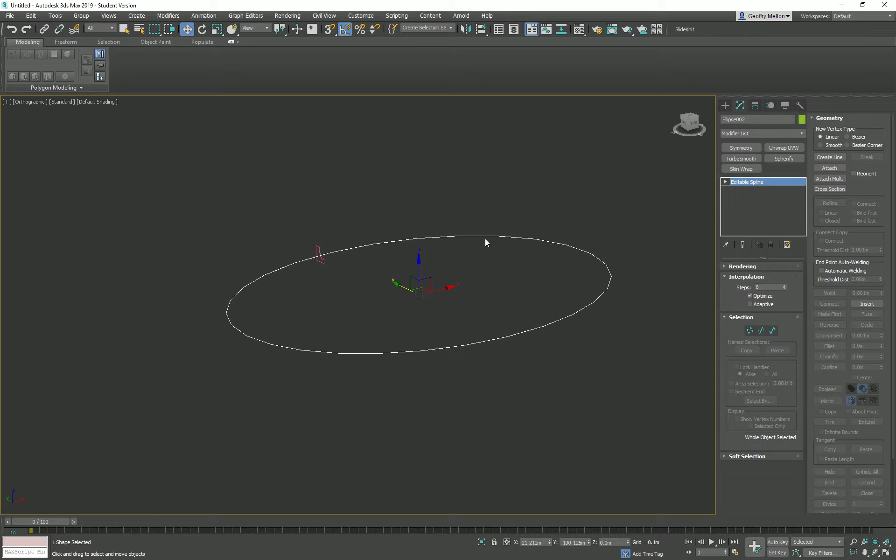So if I come back here and go to edge mode, and grab these and this and delete, I've got just this curve. This is kind of what we did in class. And then I'll take this one and come back to edit poly, or...

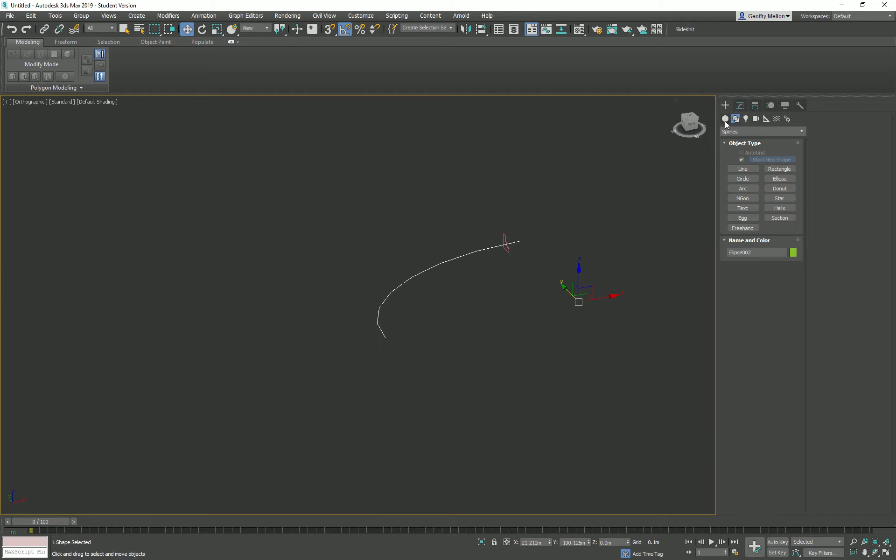Create compound objects, and I'll say loft, get shape, and click on this. Now I've got the shape that I want. I may want to turn up the interpolation this time, so I'll go to the modify panel and turn it up - why not?

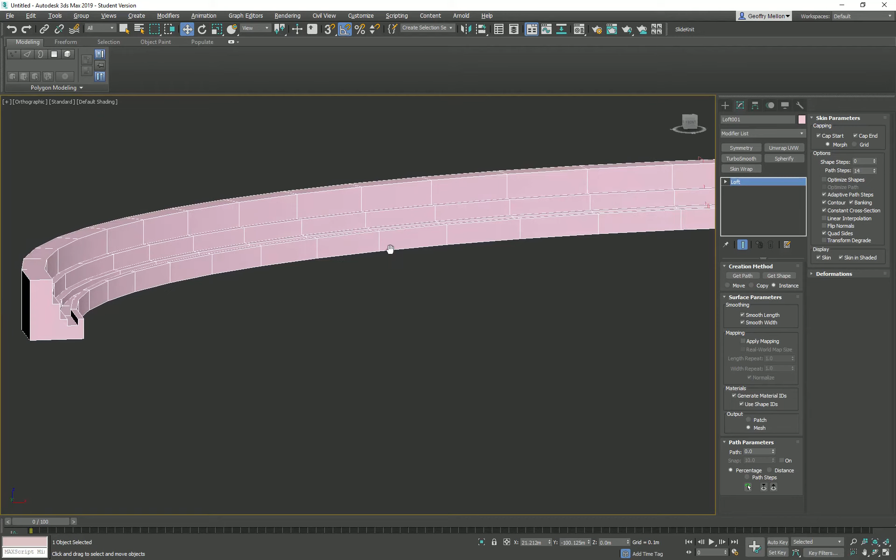Okay, so now I've got a quarter of my arena. I've got to change to an editable poly at this point, or even if I don't, let's leave it that way. And then I come here and I see this is the center point.

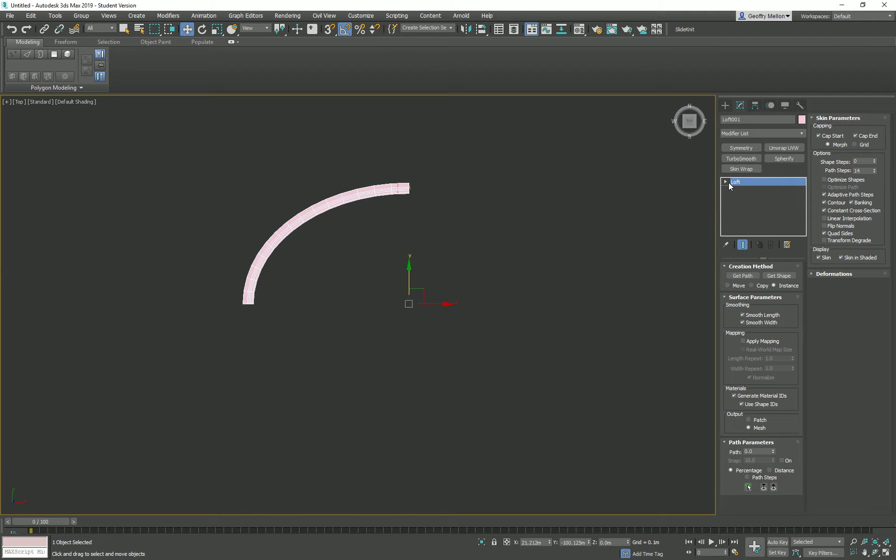I want to mess with the path in here. If I open this up, I can see the path. And if I look at what I'm looking at here, it's actually giving me control over the verts inside the path - so it's like letting me go back in time. I'll pull this back a little bit. Well, that's unexpected.

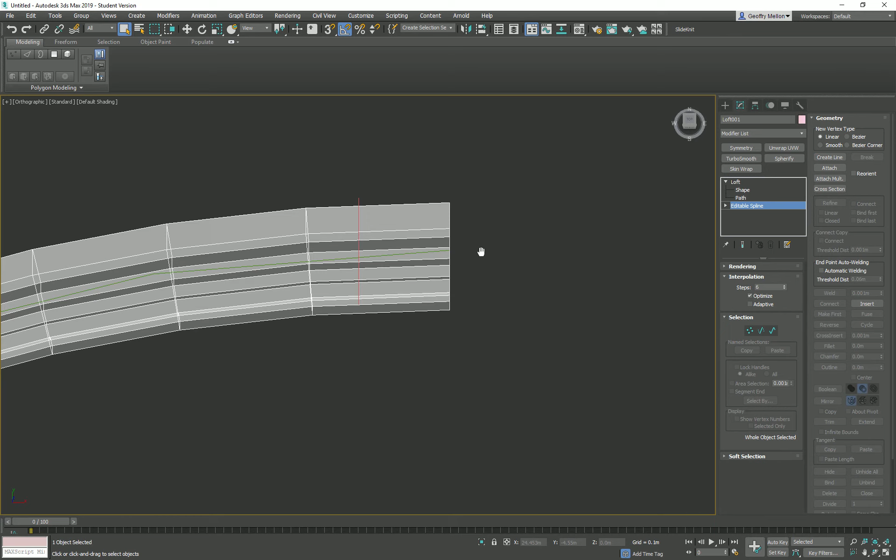Oh, to shape path is what I meant. Oh, back to editable spline. Go back to vert - there we go. I'm like, why is it... oh yeah, that's what it's doing.

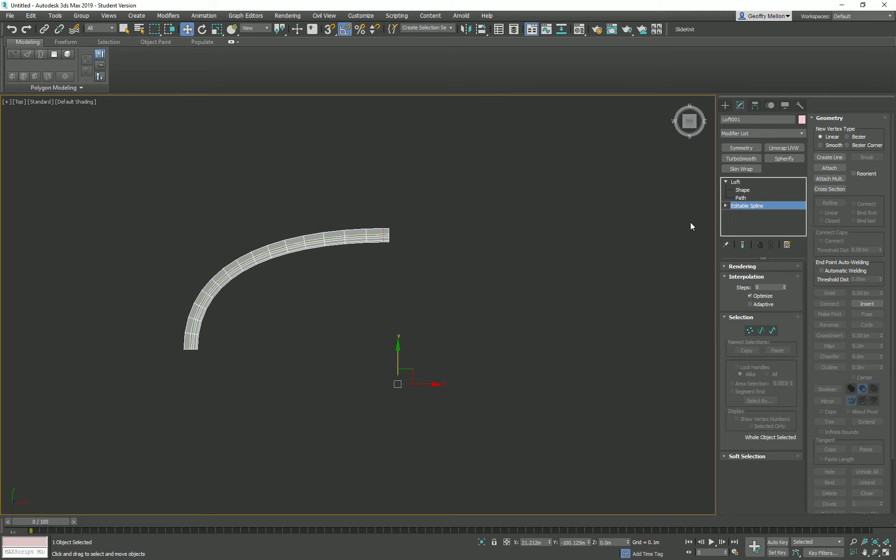So I'll move it just a little bit in, and move this one just a little bit in, like that. And I go back to top view and look at this - there's my arena.

Then I can go back out of the loft shape, and use symmetry, and say flip. Now I've got half of the arena with a gap in the middle. And if I do another symmetry and say Y - there you go. So I've got an arena, more or less, what I'm thinking of.

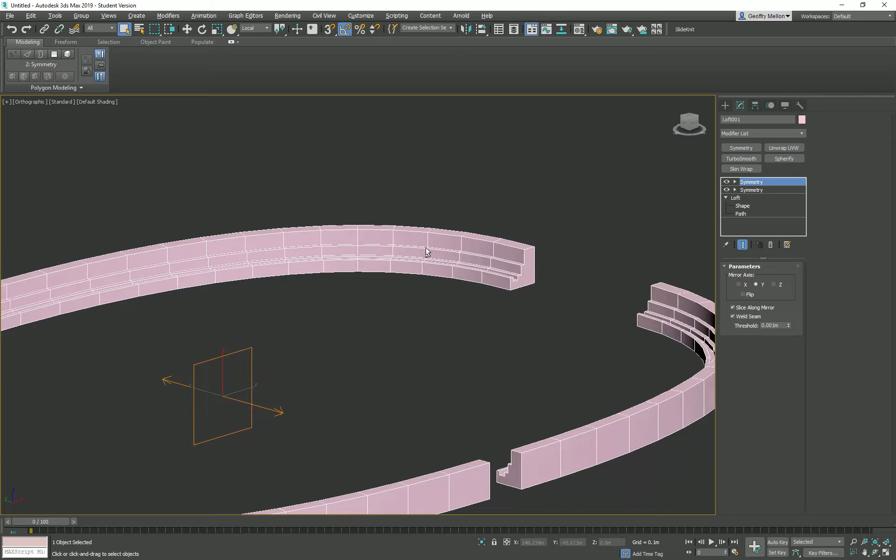And, you know, a really crappy one because of this huge tall thing, and these are uneven - all the reasons why this doesn't work great. But it's there. Now, how would I build that in 3D? Probably not really easy. This may be the best way to do this if I was going to do it this way, or I just do it with the poly and pull out the faces and get it to turn and dance. This may be the fastest solution.

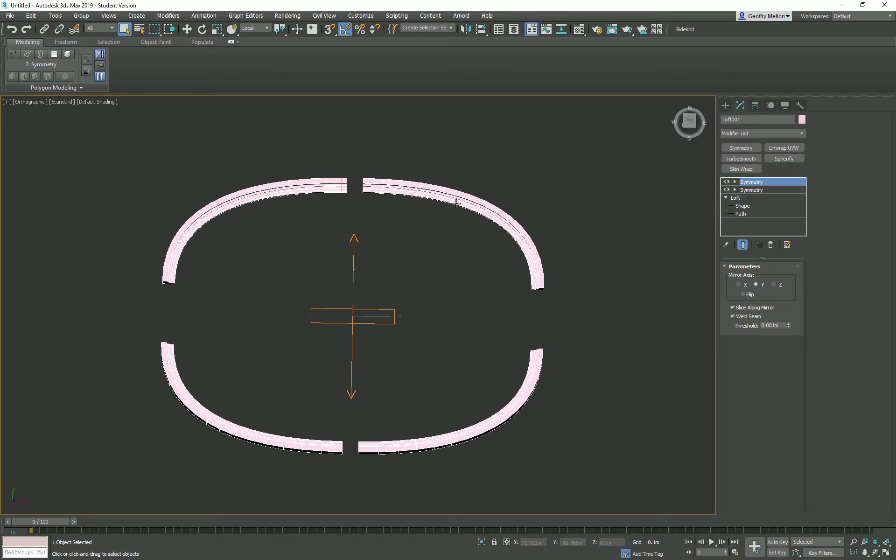Like I said, sometimes these are the fastest solutions - they just don't jump into my head unless I'm thinking of things I need to make like this. So that's editable splines. You can do a lot of fun stuff with them, and you can do a lot of nothing with them too. You can spend your time, but I'm worried about you getting to the final point where it's the 3D object. So if you want to use these to get to some of your 3D objects, have at it, you're more than welcome. And that's all we have.